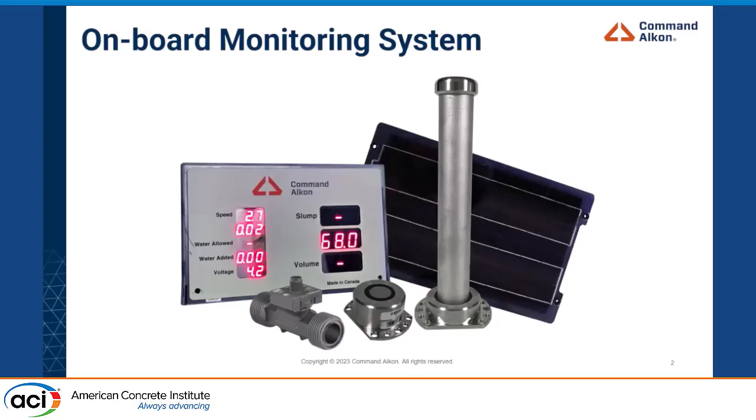For more than a decade, what we do is develop sensors that we attach to the truck. You've got a photo of it there. We can see there's a display to show the measured values, and in the middle of the photo there's a long metal tip, that's the slump sensor, and on the left of it we have an air content sensor.

So we attach all that stuff to the truck. As you can see, right on the drum, there's the slump sensor and the air content sensor attached. Every time the drum makes a revolution and goes through the concrete, we measure stuff, send it to the tablet inside the cab, which does calculations, shows the values on the display, and sends everything to the cloud. So both the drivers and people at the plant can see all those measured values.

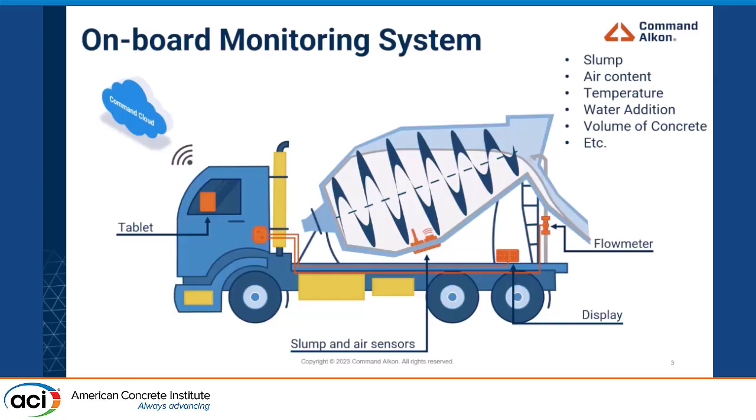As I said, we can measure the slump, the air content, temperature of the concrete as well, water addition through the flow meter, and volume of concrete, for example. So the point of my presentation is to see how these kinds of systems can help at every step of the production. In the next slides, we're going to go through all those different steps of production, from dispatching to the construction site and the return as well.

Let's begin with the dispatching. Basically, a dispatch software does the production schedule. You get your order from the different customers, you put them into the software, and then you can generate tickets and assign them to your trucks.

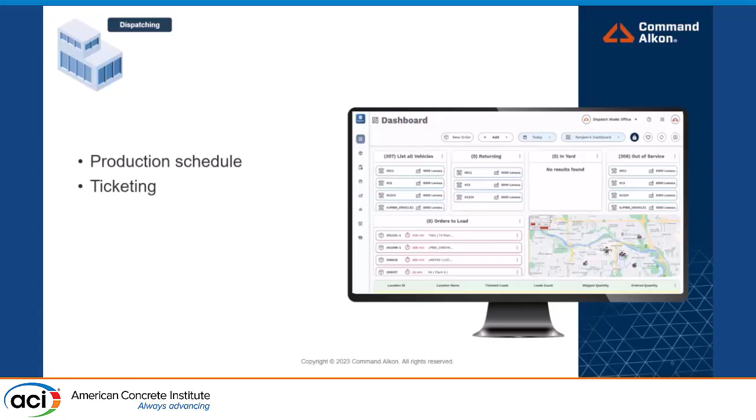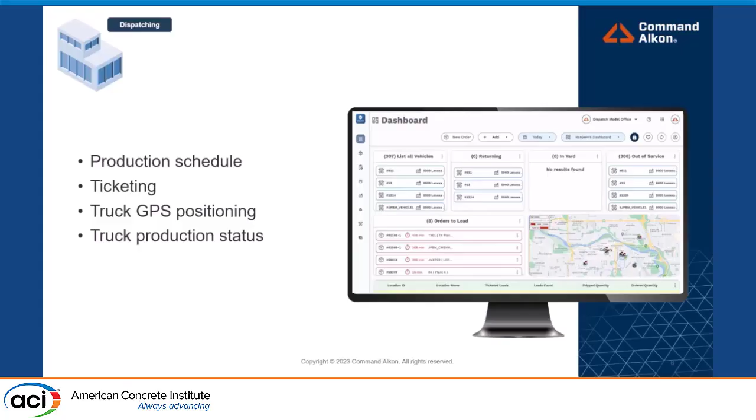But having sensors on trucks helps you have a good overview of what's happening in real time in your production, thanks to GPS positioning, and based on the sensors, you can track the current status of every truck. So you can know if you're in the pouring step or the washing step, and that really helps both the dispatcher and the batcher know what's going on. And that's it for the dispatching.

Now let's move to the batching. There are mostly two ways of producing concrete. The first one is dry batch: you put everything into the drum, mix for a couple of revolutions, and then you've got your concrete. The other way is wet batch, where you use a stationary mixer.

When we compare figures for these two methods of producing concrete, most of the time the dry batch is less effective than the wet batch. It takes more time, consumes more fuel, and emits more CO2. In the end, it costs 30% more on average. We should note these figures are for the truck only, and it depends where you get your electricity from for wet batch, but basically, it consumes more.

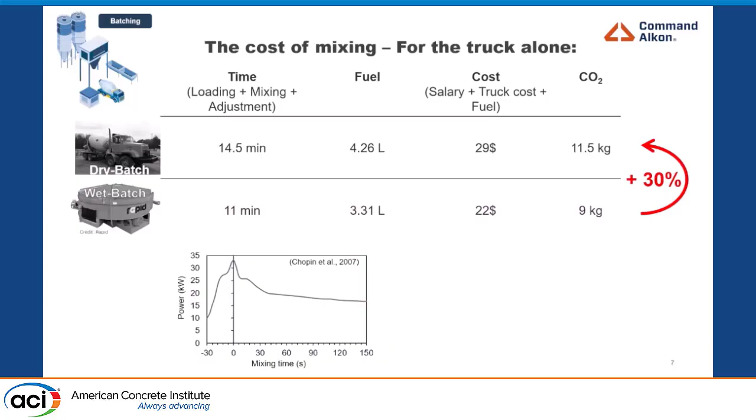When we look at wet batch, we know there are solutions that exist to measure the mixing of concrete on stationary mixers. So we install wattmeters to monitor the power consumed by the mixer, and at some point this value tells us, hey, you are homogeneous enough, you can dump that into the truck and go. Thanks to those devices, according to the study, it helps decrease energy consumption by 17% and mixing duration by 32%.

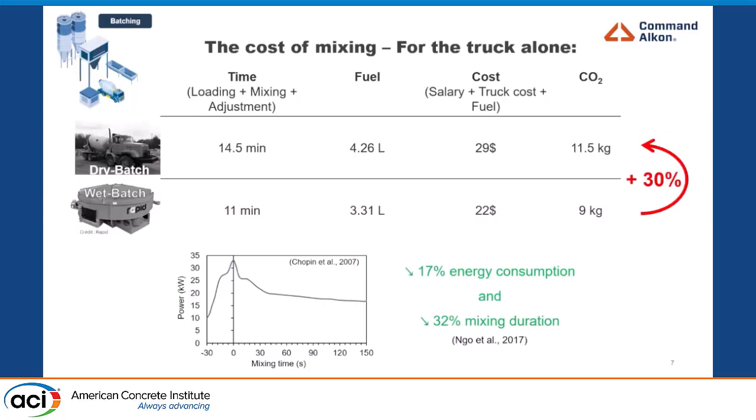So that's quite substantial. The whole idea of this—and I rewind a couple of years back when I was a PhD student—could we use those sensors to replicate what we do with a wattmeter, but for a truck? Could we use those signals to say, hey, you are homogeneous enough, go off the plant and go to the construction site, while still ensuring that concrete quality, because in the end, we still need to be homogeneous.

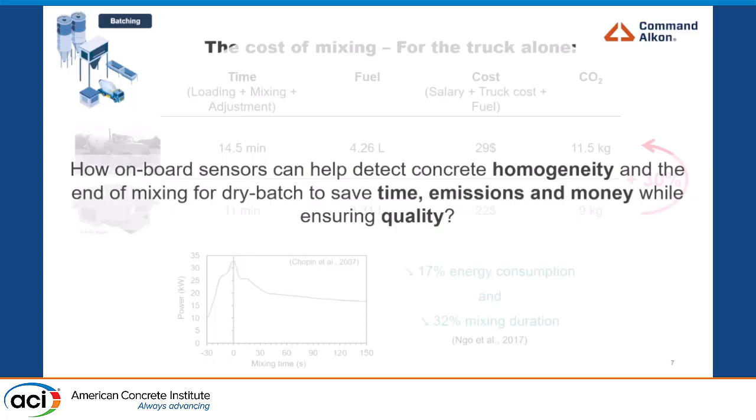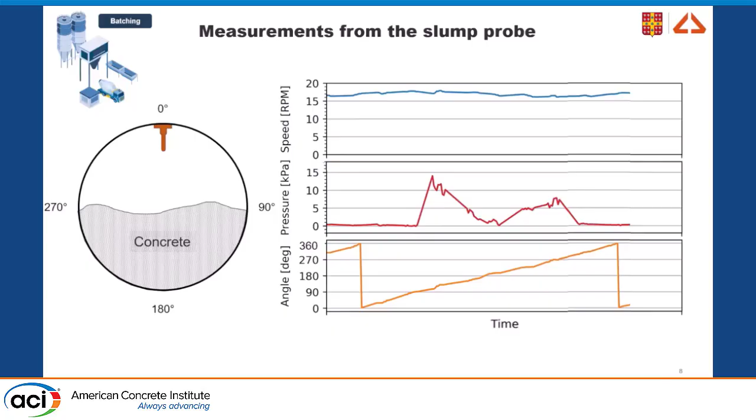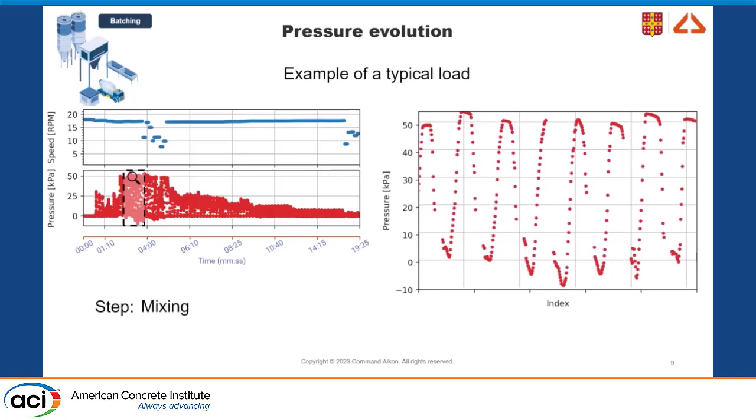Now, if we take a step back and look at the whole load of concrete: when you put your mixed components inside the drum, pressure suddenly increases, and after some mixing revolutions, you start to see a decrease in pressure. After a while and some water adjustment, you can really notice that those patterns become repeatable.

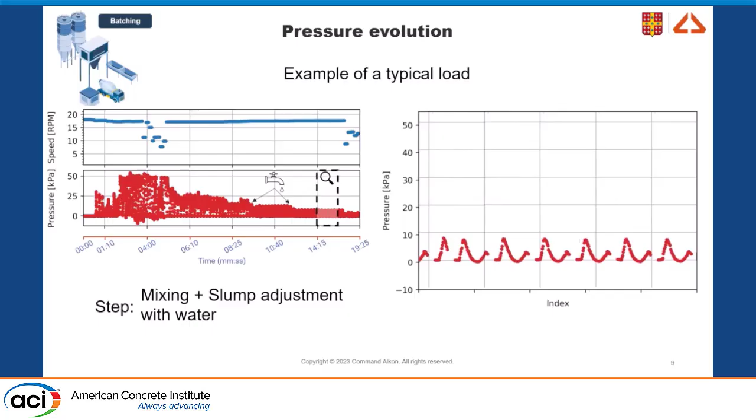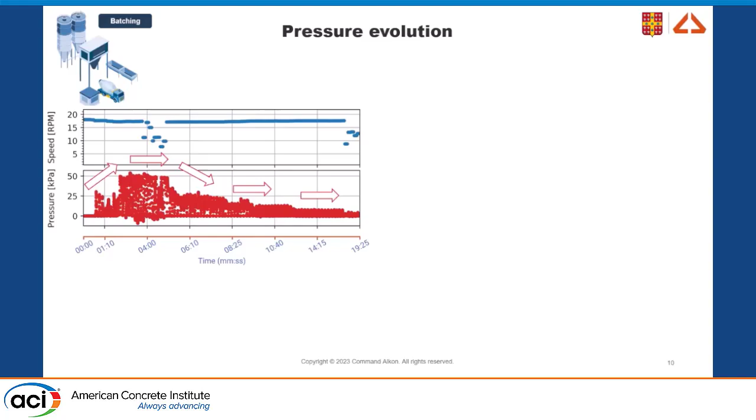So the whole point of the project was to develop an algorithm that is able to, no matter the inputs and no matter the mix, tell the truck driver this is homogeneous enough, you can leave. That led to the development of that algorithm.

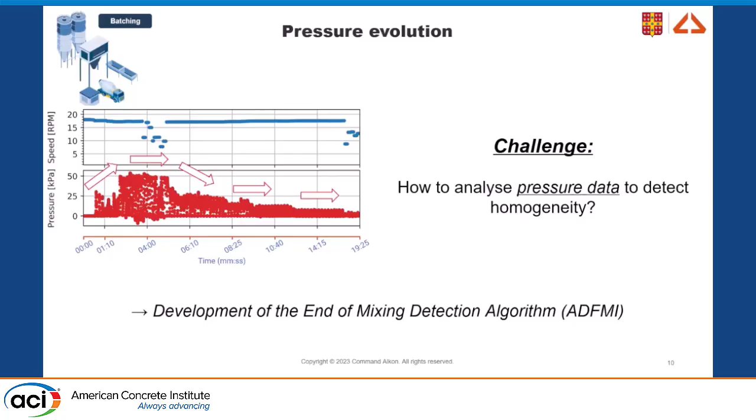This was when I was at Laval University. We studied hundreds of loads in production, and after that, when we were satisfied with our algorithm, we did specific loads with a truck dedicated to the project.

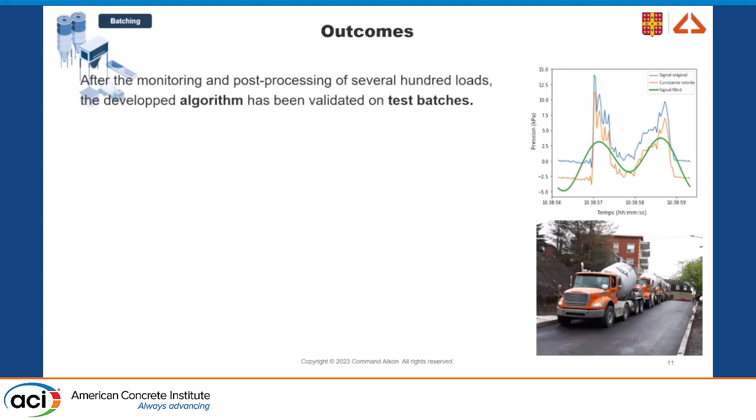We learned quite a lot about the mixing kinetics, but the first main observation was, yes, those systems are able to track this evolution, and it's quantifiable.

Then, depending on what's inside the drum, it takes a different amount of time to get homogeneous. So if you have more water, or less volume, it will be faster to reach that homogeneity.

As well, when we do some retempering, when the concrete was already homogeneous but you add something else to the drum, those systems are able to quantify again this slight variation. So that's another great tool to have.

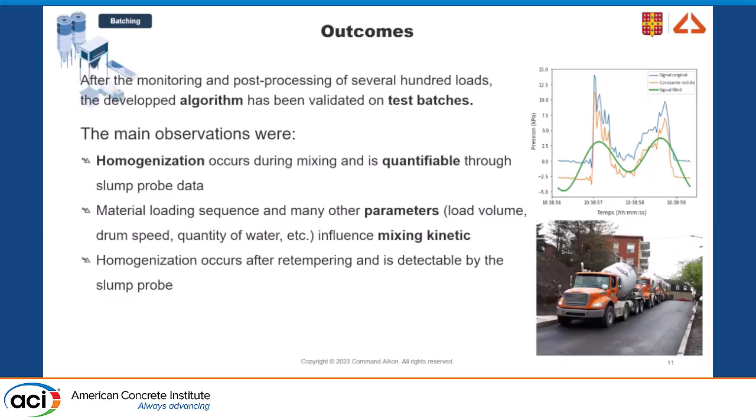Finally, what's really important about productivity is that standards require you to mix for at least 70 to 100 revolutions for every load. By having this data, we now know that in many situations it doesn't require this 70 revolution limit.

And in many other situations, let's say you've got a high-strength mix or whatever, it needs more than those 100 revolutions. So it really fits more what's inside the drum, and in the end you can save time and ensure quality using that.

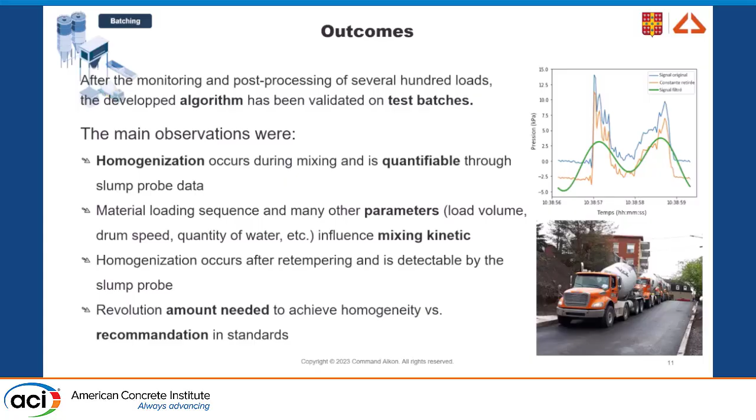So now our concrete is fully mixed, and we can get to the next steps of production. After the batching plant, usually the truck goes to the washout stand or the slump stand, whatever you call it, and the drivers just adjust the right amount of water needed to get the desired workability.

What you see at the bottom is, again, a typical load of concrete. You've got the RPM in brownish color, and then the slump in red. At the very beginning you've got your loading and mixing, and then once the RPM goes to slow speed, you get your first slump readings.

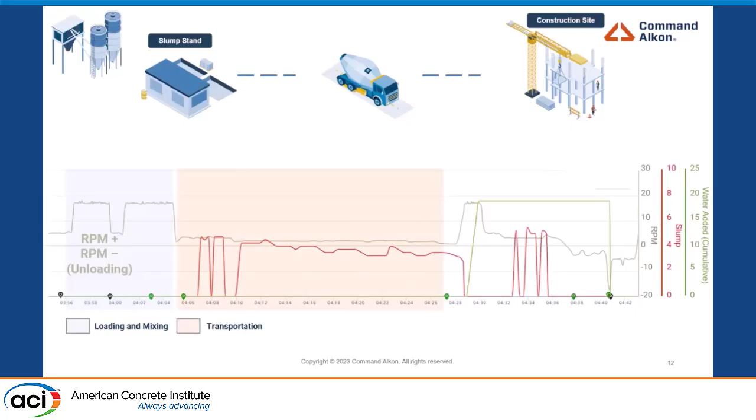Then the truck goes on the road, and as everyone should know, slump decreases - you've got slump loss along the transportation. When the truck arrived on site, the driver did a retempering to get the desired target workability. In this case, he added 20 gallons of water, just remixed, and got a new reading from the slump probe.

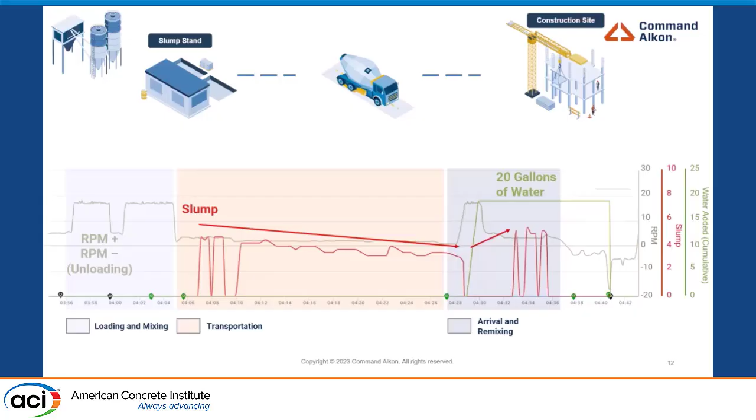So you can really feel that having this kind of system removes the eyeball from the production. You've got a faster and more controllable way of doing your workability adjustment, as well as, when the truck arrives on site or goes out of targets, you've got alerts that go to the batching plant.

Finally, you remove all of these big blind spots that you have right in the middle, because usually you get, maybe if you're lucky, one manual slump at plant, one at site, but what's happening in between, you don't know. So again, more control, more robustness into the system, and that in the end helps achieve better productivity.

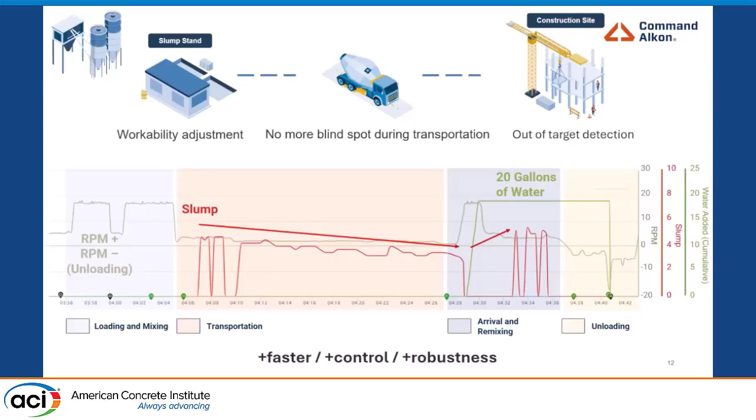I will now focus on the very last steps, which is the retempering. If we look at the figures from Master Builders a couple of years ago, 45% of the loads require a retempering - adding a bit of water to get the desired workability.

And that costs a lot. You see the figure, $30, that's a couple of years ago again, so you can easily double, maybe not double that value, but quite close.

The existing solution right now uses systems where we have the value at site. It goes back to the batching plant and tells the batcher, hey, based on past measurements, you need to trim 3.5 gallons, for example. So it is a good thing to have that value, but it still has some drawbacks.

You first need to have one truck that got to the job site to get that value with the same mix, for example. And we were thinking, a couple of years ago when I was a PhD student at Laval University, could we get further than that? Could we use the data a bit more to get this figure without having this first truck, and use more input as well? Because during the day everything changes, traffic might increase, temperature might change, moisture, aggregate moisture, they can vary as well. So could we be a bit smarter using that data?

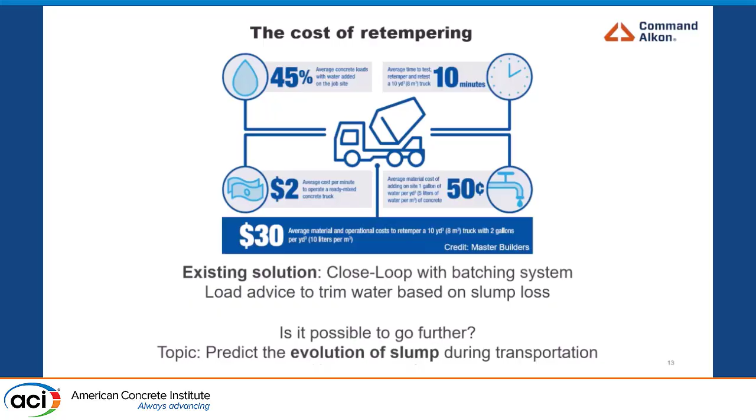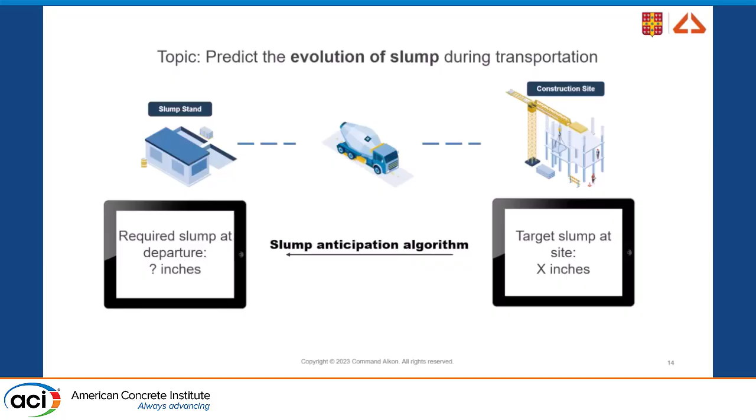So that led to the evaluation of could we use machine learning, AI, based on this. The final solution would be, instead of telling the driver the target at site is, let's say, 6 inches, it would be to say, hey, you need to be at 9 now, and then leave the plant. So that led to the slump anticipation algorithm. I will make a bit of a detour on this algorithm.

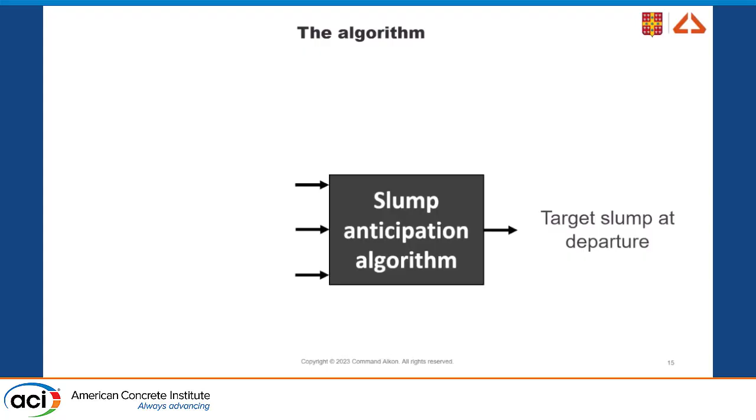So I know that's not a lot of inputs. That was mainly a proof of concept that we wanted to do there. Then we can add more inputs into that, like, for example, the aggregate moisture.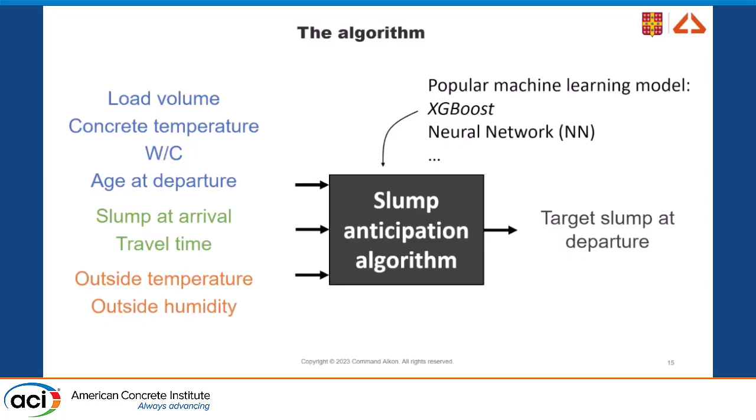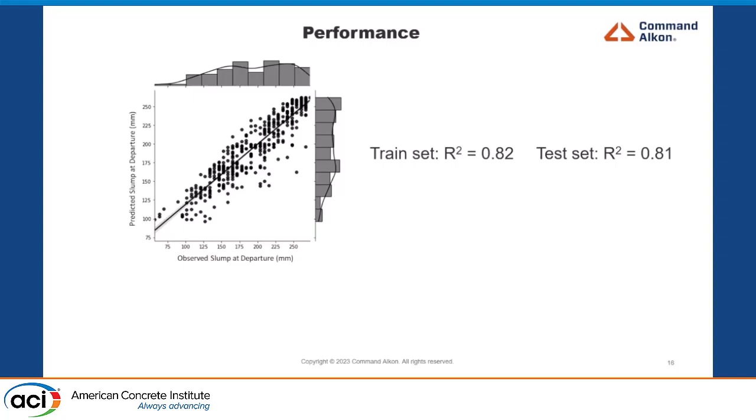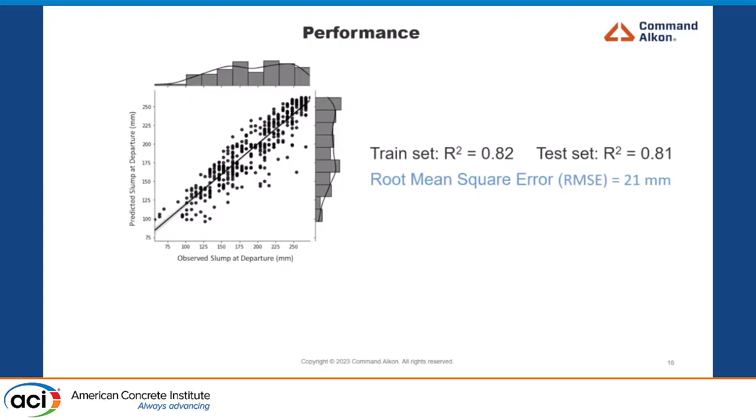So we trained a couple of well-known machine learning models on that. We used a couple thousands of loads. You see the results of it here. It compares the observed slump versus the predicted slump. Both good performances, good R squared on train and test sets here. But most importantly, when you have this kind of results, what you want to have a look at is the RMSE, the error on that prediction. And in that case, it was 21 millimeters.

When you have a look at the standards about slump, we are in the same range. So that tells us that the model is performing quite well at predicting what should be my slump at the plant.

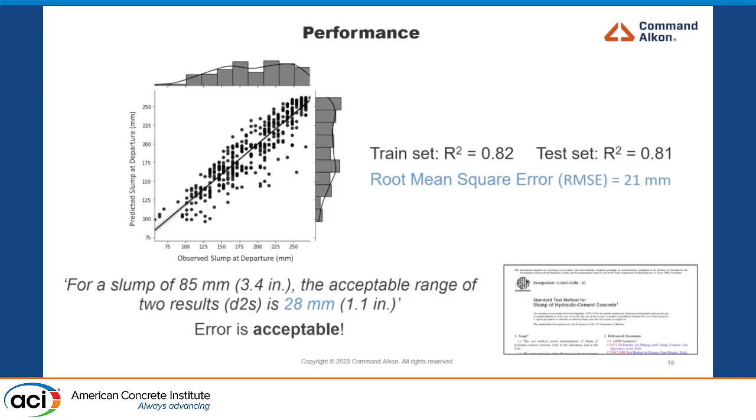Now let's move on to the construction site, and I'm glad that Jacob mentioned rheology, because we will go a bit further on that topic. For people not familiar with rheology, that's the study of flow behavior. So we basically compare how the concrete moves compared to the amount of force that we apply to it. Water, you've got a glass of water, you bend it, it starts to flow. Concrete is a bit different. You've got a yield stress, and this is what we measure using the slump, in fact. But then as well it has viscosity.

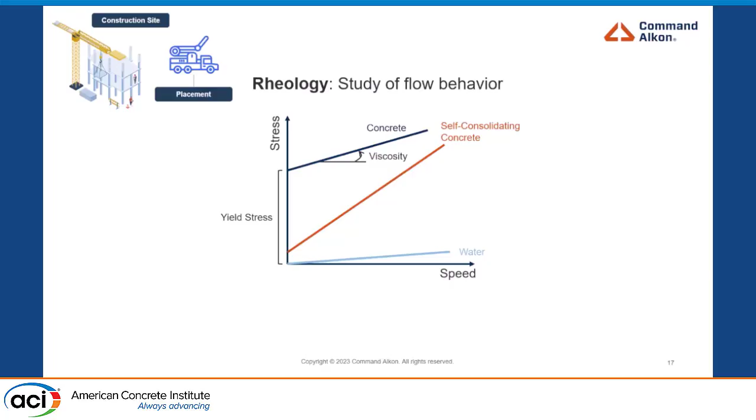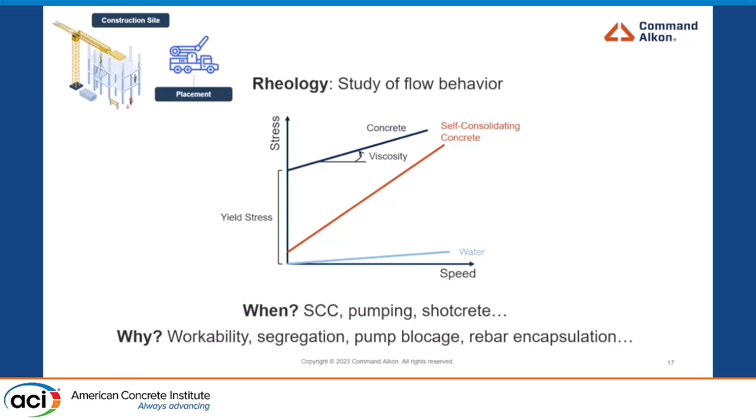As many of you know, SCC, for example, is easier to move, but it has a higher viscosity due to the amount of paste, for example. And you may wonder, why is rheology so critical? Because when it comes to specialty concrete, we've seen tons of examples of segregation in past presentations. That all comes through this rheology and viscosity importance. And it all matters for productivity as well, because by having the right rheology, you don't get so much pump blockage, you don't have any issue with rebar encapsulation, so that's critical. But for now, it only stayed in the lab.

It's quite difficult to measure rheology. It costs a lot. We typically use what we call a rheometer to measure rheology. This is some apparatus you don't have and you don't want to have on every job site.

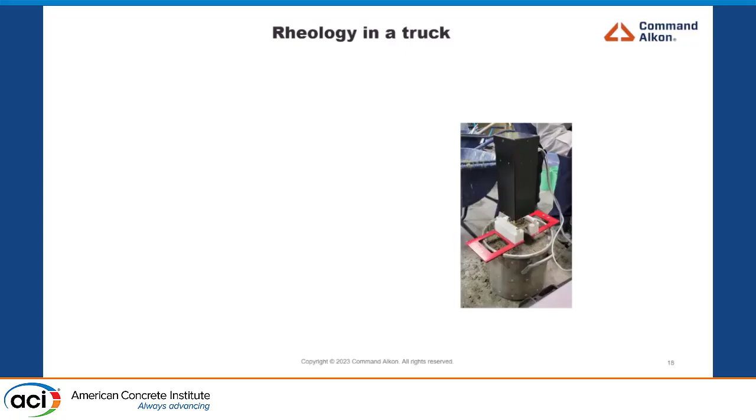So we were thinking, could we measure that viscosity and that yield stress using those onboard sensors?

And the next result I will present comes from a study we did two years ago in Japan. That's much more like a pet project for us. This is something we do on the side because we don't see a lot of people who want that as a commercial feature, but still this is something we really look into because it's interesting and still a challenge.

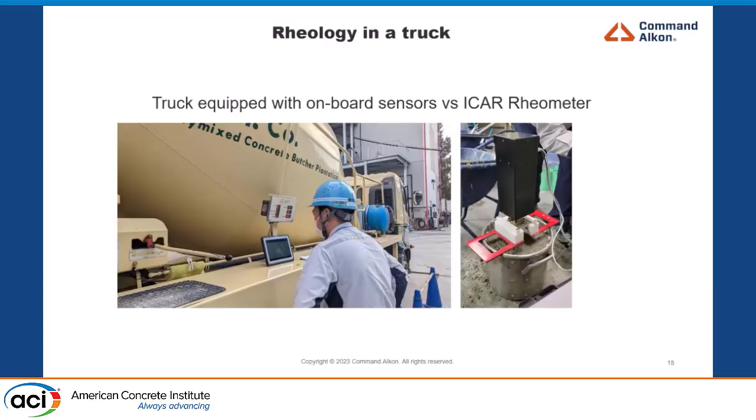That's not tons of results, but still we can feel that there's some opportunity to measure rheology using those sensors.

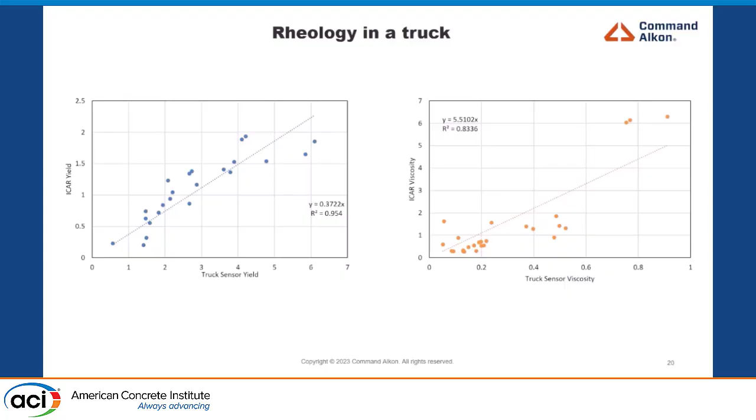So let's wrap it up. We deliver our concrete, and in many situations there's still some leftover in that truck. And in fact, if you look at the figures, it's substantial. I don't know the amount of Olympic pools you can fill with that amount of concrete, but that's a lot.

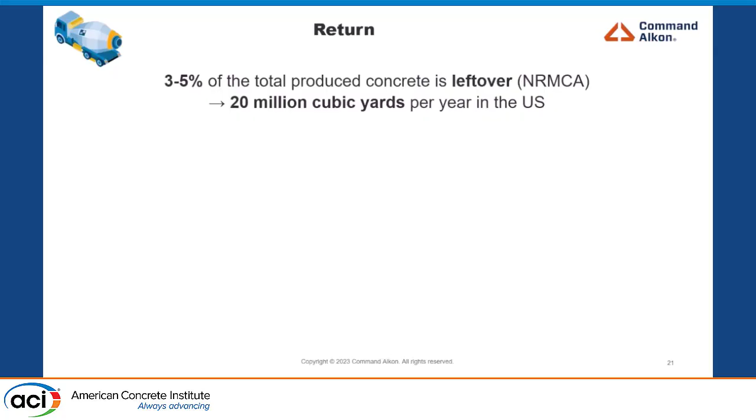When it comes to the different strategies you can use for that leftover, you've got different ones. If we start with the upper ones, you let it set on the ground, you crush it, you don't really use that concrete in the end. After that, you can do precast blocks, that's a bit better. You can dry it up, and finally, that looks like the best solution to me, is to reuse that concrete. So as you go down that list, the environmental and economical benefit you gain from those strategies increases, but the level of complexity increases as well.

And again, this is something where onboard systems can really help. I'm not talking only about the one we're working on — Nathan will be presenting after me, so there are other people doing that kind of stuff here, and that's a great thing. So when I say onboard sensor, it is in general.

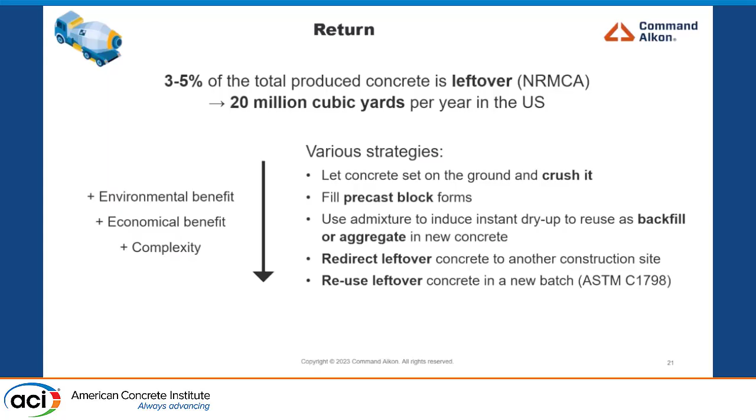The last one in the list is pretty interesting because for a couple of years now, ASTM allows that reuse. And when we look at that ASTM standard, there are a couple of things you need to achieve before having the right to reuse that concrete. For example, you need to measure the volume at a quarter cubic yard accuracy. There's a time limit, but you can use that admixture to extend that period of time. So you are allowed to do that, but it is difficult, it is difficult for sure. But now we've got tools to do that, so that's great.

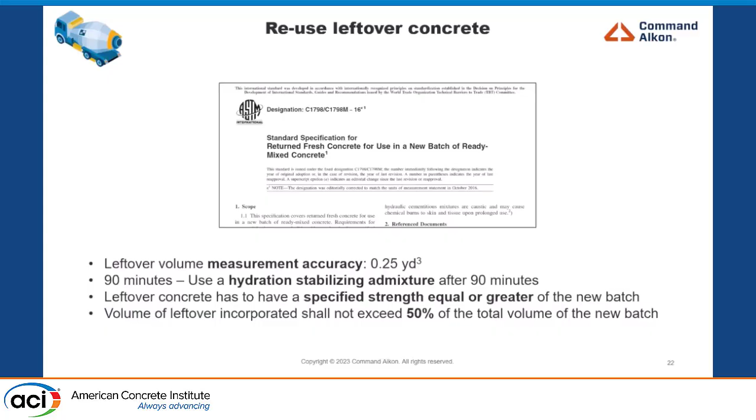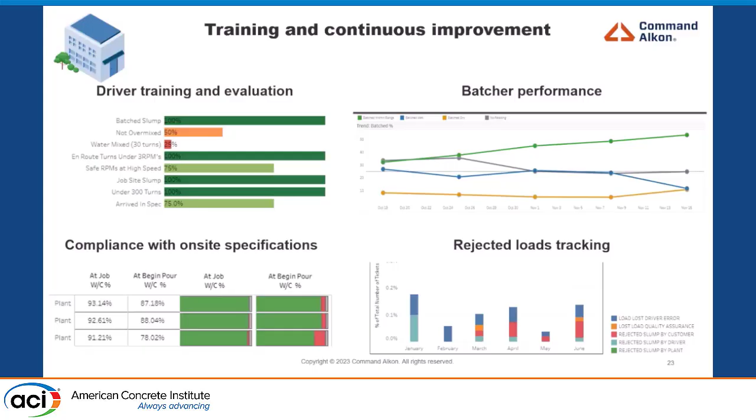I'll finish this presentation going back to the office. Having a lot of data is great, but you can easily get lost in it. The great thing is most sensor suppliers now provide dashboards where you can use that data to track the performance of your driver, of your batcher. That way you can really spot where you can improve the training and get things done more quickly, with a better output from your plants. And that's the end of my presentation. We went through all those steps.